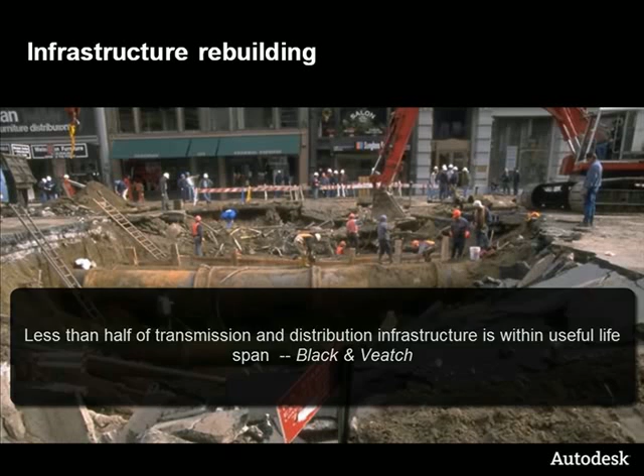Well, and of course that leads to failures. We've seen some of the reports on TV with pipes bursting in New York and so forth. These failures can be catastrophic and extremely costly to repair. That's correct, and because of this, utilities are trying to get smarter about asset management and reliability-based preventative maintenance.

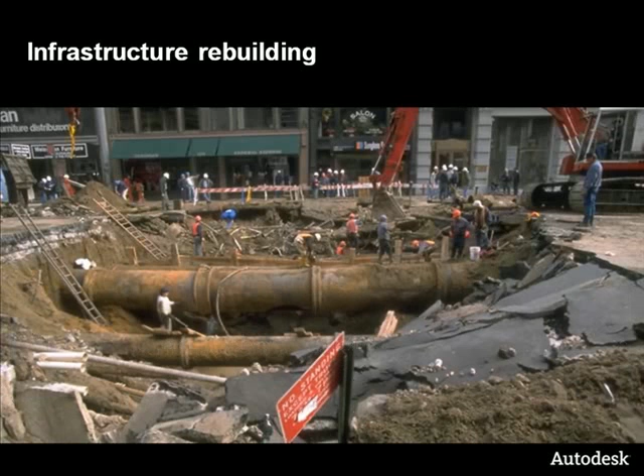So would it be fair to say, Teresa, that all of these renewal projects require design productivity and innovation, as well as much more complete, accurate, and accessible infrastructure models? They need better coordination with a variety of stakeholders - the community, local agencies, and even other utilities. In fact, coordination and accountability will be demanded of agencies receiving government stimulus dollars.

So productivity and efficiency is even more important now because everyone's watching their budgets. Would you say that's correct? That's right, they have to do more with less and be more productive, while also worried about losing some of their workforce. This workforce that they're losing are people with a lot of knowledge about processes and service area, and that knowledge loss can also slow down productivity.

At the same time, utilities face continued pressure to provide reliable, quality service. And it doesn't stop there - even regulators and government agencies continue to pass more stringent reporting requirements for environmental and public safety programs, to name a few. All of these require ready access to the latest infrastructure information, and frankly, a lot of utilities just can't get to that information quickly.

It sounds like infrastructure, productivity, efficiency, and service quality - these three topics will resonate with every single utility. I would agree. Pete, what I'd like to do now is talk about why Autodesk within the utility industry specifically. Utilities have to extend the accuracy, precision, and value of infrastructure information to design and manage water, wastewater, electric, and gas networks more efficiently and sustainably than ever before.

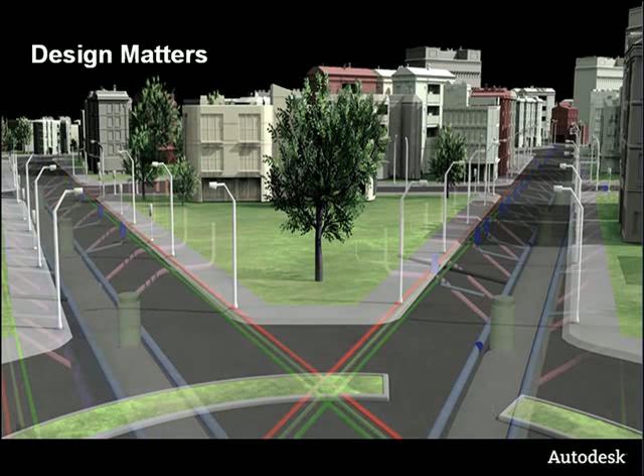All of the challenges we just talked about, they all require design work, and increasingly complex design work. That's correct. An intelligent grid project requires that the utility design their network down to the location of the smart metering devices at the customer site. And a water system renewal project requires detailed design of piping locations and connectivity, as well as up-to-date information on current asset status and condition.

New designers need standardized processes and intelligence built into these design tools. It's incredibly important to note that we've got a number of existing utility customers that have an investment in AutoCAD-based solutions. They want to maximize that investment, and maximize on the training of their existing AutoCAD trained personnel. The beauty here is that the existing user base is familiar with that AutoCAD environment.

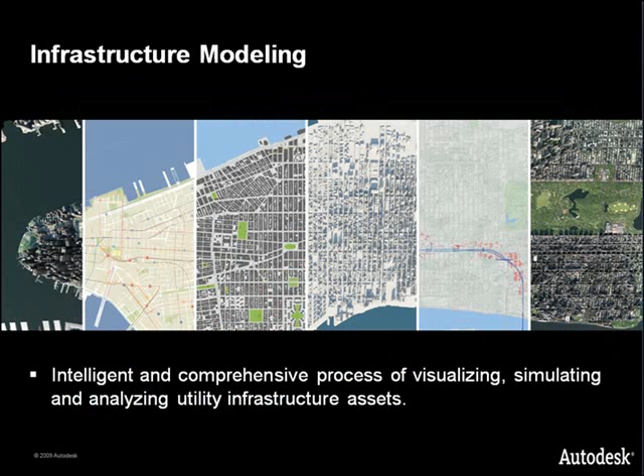So when we talk about utilities managing a more complete infrastructure model, what we really mean is an intelligent and comprehensive process of visualizing, simulating, and analyzing utility infrastructure assets. Because they're sharing this information across the lifecycle of design, build, operate, and maintain, this helps to improve productivity, efficiency, and responsiveness. And of course, more easily handle customer requests, more quickly respond to outages, important. That's right. And more effectively provide information for reporting and decision analysis.

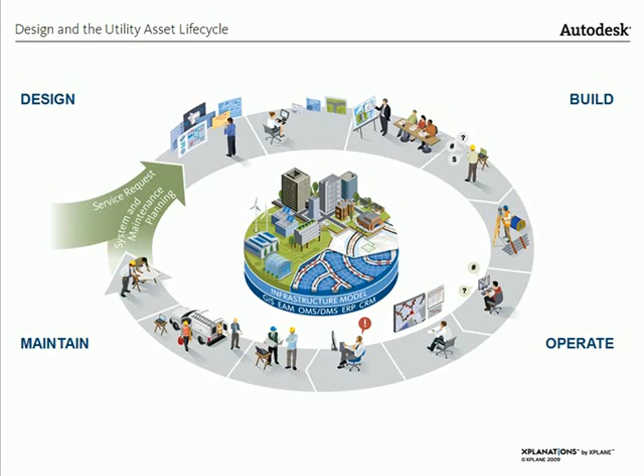Absolutely. Where we want to focus today is on the distribution networks for utilities and that lifecycle we've mentioned: design, build, operate, and maintain. And I would like to start with design, if that's okay with you.

Yep, please do. So a new service request comes in, and it might be coming in from an external agency, and they provide utilities with many types of data, and the utility has to consume and assess this data in order to begin that project. Sometimes these contractors provide data in CAD formats, but it could be in other formats too, like raster images, GPS coordinates, survey data, and there's a wealth of other formats too. Right, all sorts of forms.

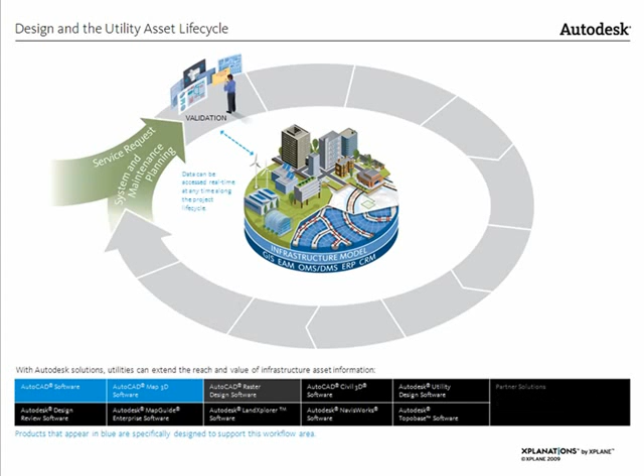And this data, along with the information that the utility already has, maybe about the service area or location information, must be aggregated. Also, another thing to think about here is planning. This whole project could actually be coming from the utility itself, because when they go through their system and maintenance planning, they may identify a project that requires design.

But the big burning question is, how do you do this? The designer needs to consolidate data from external sources, and from the utility's internal systems also. There may be a wealth of information internally. And many complaints we hear from utilities regarding data and integration of accurate data comes from this stage. For example, experiencing data inaccuracies from multiple drafters or poor digitization.

The need for a more intelligent design tool that understands attributes associated with design elements. A need to view and share design and mapping data without making a large investment. They're having difficulties incorporating geospatial data from multiple formats, looking at ways of geo-referencing the designs and easily distributing the information to other workflow applications, distributing information internally and externally, using websites, map books, and publishing information.

Let's take a look at how Map3D aggregates the data. And in order to do that, I've got a colleague of mine, Arnab Ganguly. Arnab, can you explain, please? Yep, thanks, Pete. So what we are looking at right now is the existing overhead electrical wires being pulled in from an infrastructure model. The first step for most projects is for the planner to pull together information from multiple sources to get a clear picture of the project area before doing their work.

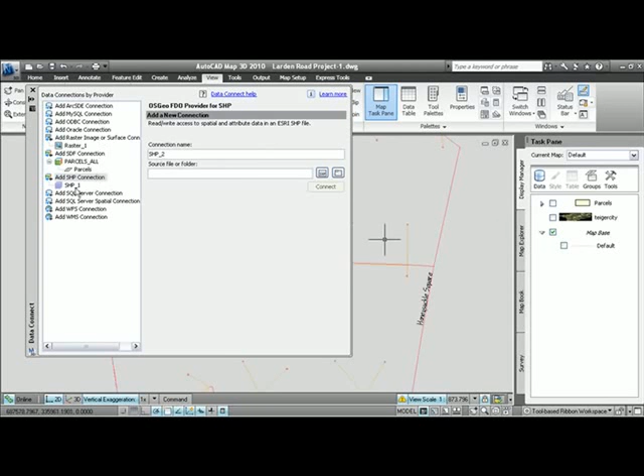Now, Map3D is an ideal tool for this planning step, as you can see here. The planner can very easily pull in data from a variety of sources. First, we will use FDO to pull in building footprint information from a shapefile. Once the planner has the existing utility facilities and building footprints, to properly plan the new network in its real-world context, the planner is going to bring in some satellite imagery. To make sure that they have all the right easements, they will bring in parcel data from a local land department.

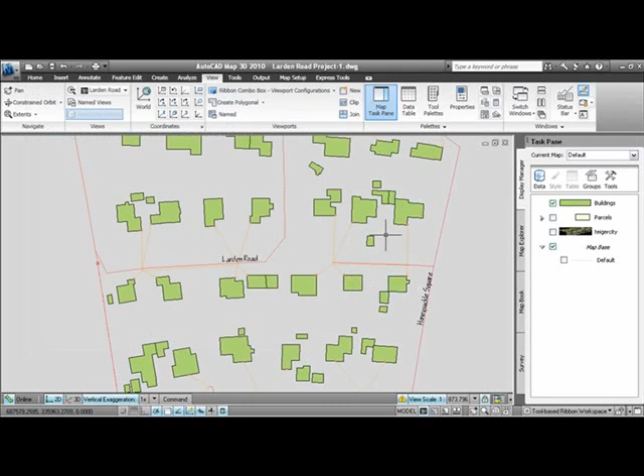And finally, information from the water utility, because crews are going to dig up the roads, and obviously the planner needs to know exactly where the existing pipes are so that they don't send the crew to dig up the wrong areas.

Once the base map is ready, the planner has all the information they need to understand the project and its impact. With this base map data and Map 3D, the planner is now ready to communicate requirements within the utility, with other departments, and coordinate with other utilities on the project. So the planner has effectively all the information needed to understand and communicate project impact.

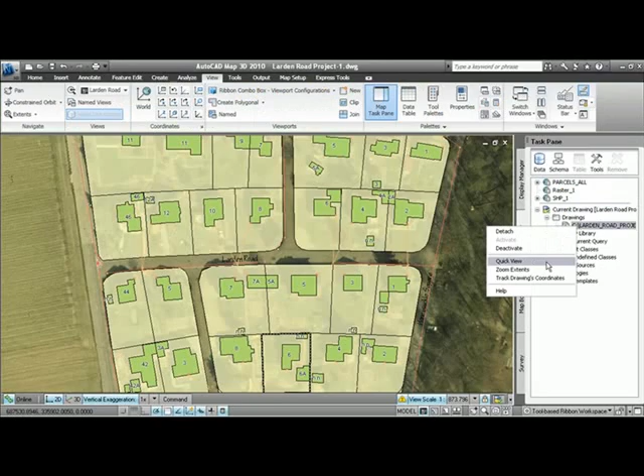So there's more to this design than we talked about, though, Pete. There's some precision design necessary to really address productivity and integration, right? Absolutely right. Autodesk software helps improve design by automating steps to the design process, such as the ability to right-size equipment.

Wow, what a concept - having the right equipment to do the right job. Perform what-if scenarios and engineering analysis, create documentation, identify materials and costs for the project. Automate some of the processes, integrate to work management systems, and generate accurate bills of materials.

These are all things that Autodesk Utility Design does extremely well. And why not do that first in the office - get the design right, the what-if scenario right - before potentially expensive mistakes are made out in the field.

That's right, that's for the electric utility, but on the water wastewater side, we also have AutoCAD Civil 3D for site assessment, trenching, and grading. And even at the water treatment facility, we have tools like AutoCAD MEP to help design that treatment facility as a 3D model before they go into the field.

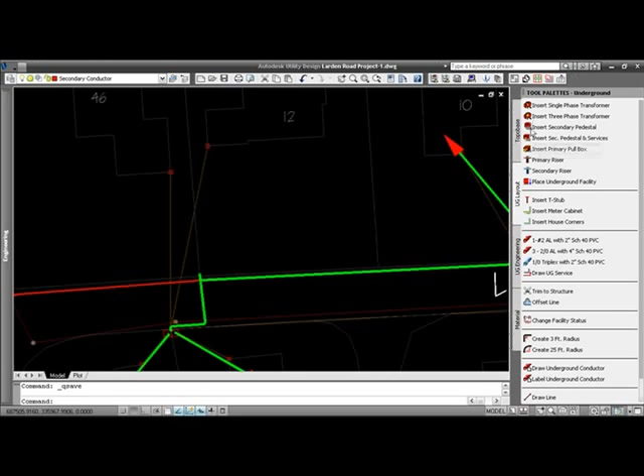Yes, thanks again, Pete. So the next step in the process is for the designer to lay out the new underground network. Today we're going to use Autodesk Utility Design to do this work. As you can see, it's a familiar AutoCAD user interface with utility-specific tools in the tool palette to facilitate layout.

First, the designer adds a pad for the transformer to sit on. They then add the underground line serving these houses. Note that these are not just lines on the screen - these are conduits containing cables. There's intelligence in the design.

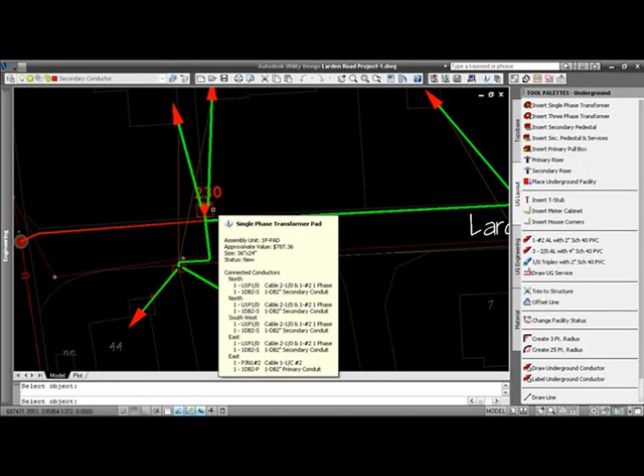So we can just click on the transformer pad and see information about it - for example, the estimated costs and sizing data.

The last thing the designer will do is ensure that the transformer is properly sized to serve the new connections. Analysis like this is a great way to build intelligence into the system, to help utilities that have experienced workers retiring and being replaced by less experienced staff get up to speed and be productive quickly.

So here on the left-hand side of the screen, we can see the sizing information for the transformer, and that it is properly sized.

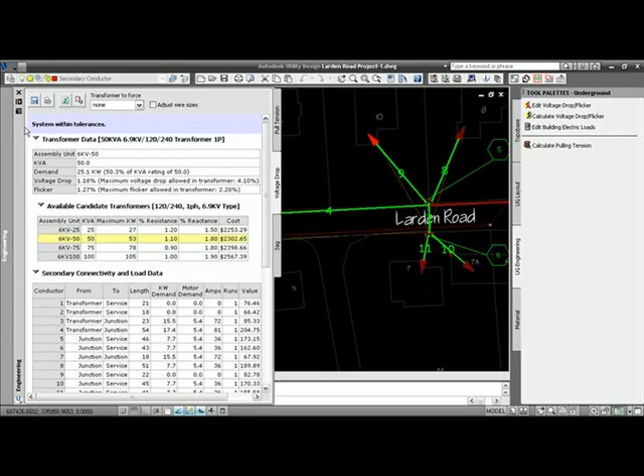So Pete, let's talk briefly about visualization. Often designs and plans must be shared with internal and external stakeholders.

Absolutely correct. Sometimes they have to take this information, these designs, to the city planners or economic development agencies. Projects such as transmission corridors, community development projects have to be presented. In fact, information in a lot of cases needs to be presented to public meetings in the way of exhibits.

Autodesk software provides the capability to manage and visualize these designs with web collaboration and 3D visualization tools. The web collaboration products that we have are Autodesk MapGuide or Autodesk Topobase Web. And let's not forget there are other visualization products in the way of Autodesk LandXplorer or Autodesk Navisworks.

For today, I say we move on to a very important step, and that is ensuring that the most important information for these designs gets to the field. Let's talk about build. Construction documentation, including designs, maps, bills of materials, and other data are distributed to the field.

Autodesk software provides the capability to deliver this aggregated design and geospatial data in a format that can easily be accessed, annotated, and even redlined by the field, and can generate maps for construction documentation. As we mentioned, we have products that provide very detailed project information out to the field. When we talk about water and wastewater projects, often you're dealing with an engineering construction firm that works with the utility to complete these projects.

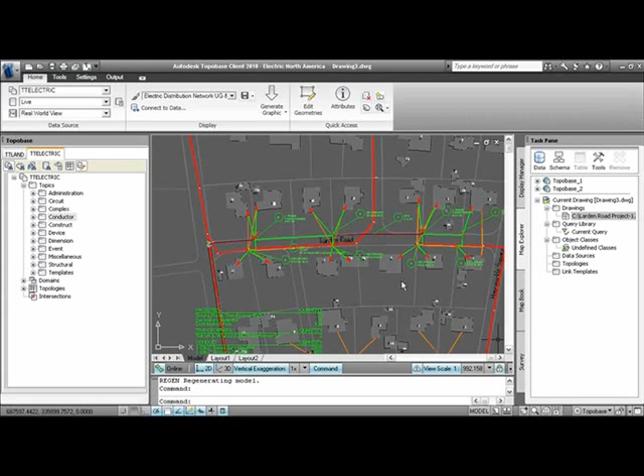Typically, backlogs are a huge issue for utilities in this process, and creating the infrastructure model directly can drastically reduce these backlogs. First, you see the design information overlaid on top of the infrastructure model. Then we check the new assets into the model, and Topobase automatically recognizes what's new and adds them into the infrastructure model, applying business rules to ensure data quality.

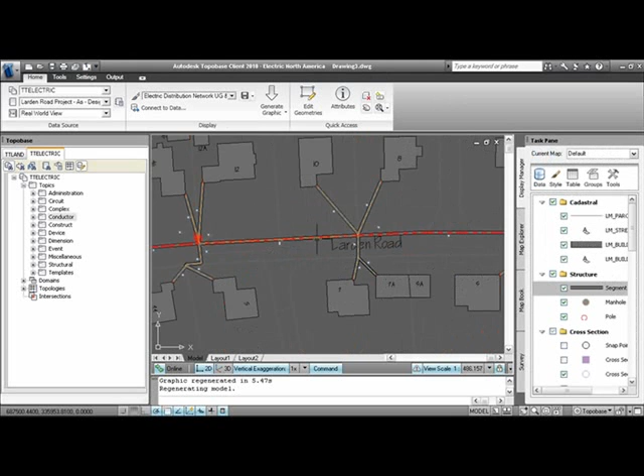Finally, once the infrastructure model is up to date, operations can do things like look at the schematic of what's happening underground. Here we see the configuration of the conduit. This is a very important step in maintaining assets, because if you ever do have to do repair work, it's important to know exactly what's underground and precisely where it is.

Now let's talk about operate. We now have these as-builts reconciled into the infrastructure model, and these updates are now available for anyone within the utility. This infrastructure data provides information that's useful for operations engineering, or is even shared with asset management systems. Absolutely correct, and now the utility has accurate information about the network.

And if there is, and when there is, a service disruption, an event triggers a number of reactive responses, for example customer phone calls, and proactive ones, for example sensors in the network notifications, sensors and network SCADA systems. This can be as simple as a single service point location outage or leak, but it could also be a more significant disruption of service over an entire area.

You're absolutely right again. Autodesk provides visualization software that can help customer service or the control room access geographic location as well as asset information about the network. Our customers use our web-based utility solutions built upon Autodesk MapGuide.

So I get it — we looked at the four primary areas. In fact, we only looked at three of them: design, build, operate. What's the fourth one, Teresa? Maintain. So now we're in the maintenance and planning phase of this life cycle.

It's important to note that a change to the network can happen as a result of a service disruption like we just talked about, but it could also be the result of internal planning and maintenance activities. Absolutely correct, and it's all around assessment.

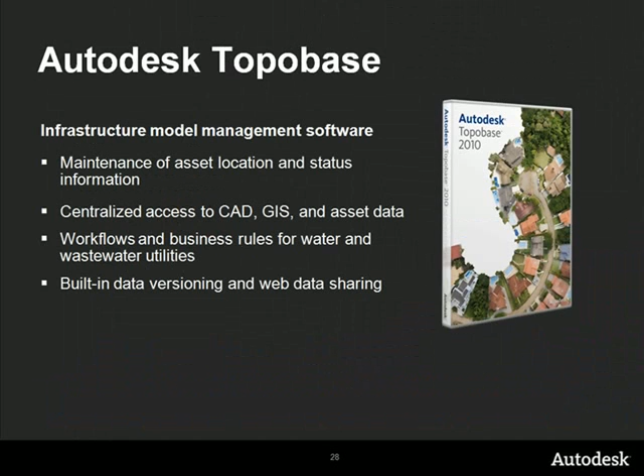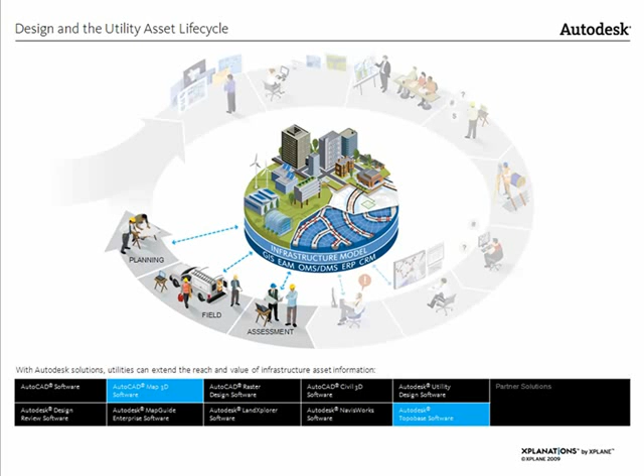We've gone through the complete life cycle of our infrastructure: design, build, operate, maintain. One thing I'd like to bring up again is system planning and maintenance planning. We've talked about it a few times already, but the point I'd like to make is that this happens all along this life cycle. It's not just happening once. No, absolutely correct, it's a continuous process.

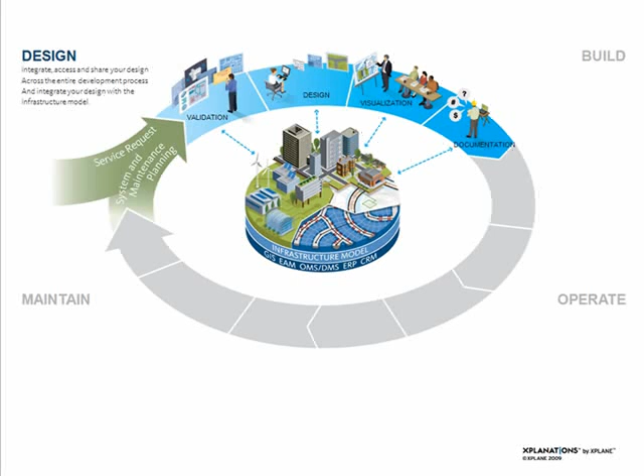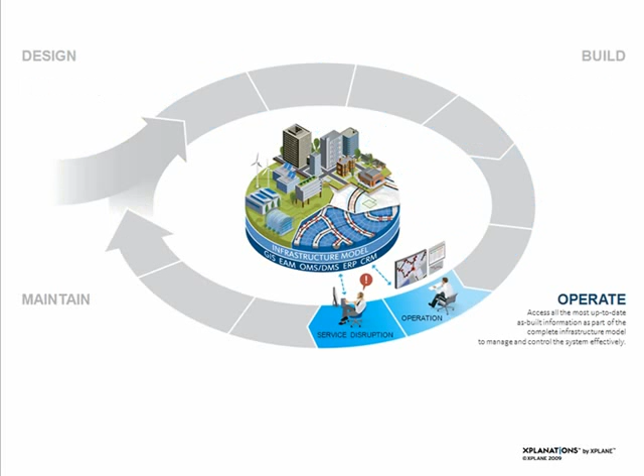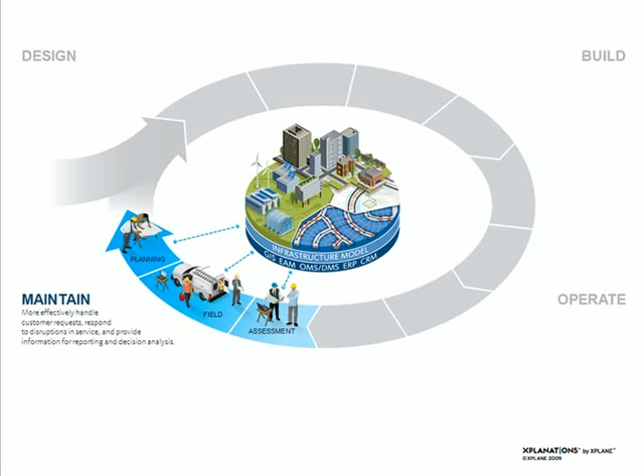Remember, all this asset information, these reports, the thematic information, queries, all of the infrastructure model in its whole glory that is aggregated—this data is used to help assess things like brand new service requests, from design straight through to the planning stage, planning for future projects that may come through, even reports to regulators or stakeholders.

Let's talk about the Los Angeles Department of Water and Power. They're delivering reliable, safe water and electricity supplies to more than 4 million residents and businesses in the greater Los Angeles area. But by the 1980s, the system's age and size were taking a toll on water service staff and those of other municipal agencies as well. So fire, police, and gas all had to deal with huge paper maps to pinpoint locations of critical infrastructure, and that was their biggest challenge.

They faced the challenge of manually maintaining their infrastructure data, and they'd been doing this since the mid-1980s. This meant a growing strain on budgets for staff and training as the city grew to become more densely populated. Employees spent most of their days updating designs manually and distributing maps on demand.

The answer was an Autodesk suite of software solutions bringing Los Angeles' vital water infrastructure into the digital age. They chose AutoCAD Map 3D because it allowed them to better utilize their AutoCAD-trained workforce, and they could also provide engineers with direct access to data and improve decisions with analysis and visualization tools.

But there was more. They could support design and as-built data flow to GIS, asset management, and other applications, and improve sharing between engineering and all of the stakeholders within the utility. Absolutely correct, and they did this with Map 3D because this software is a better AutoCAD for utilities.

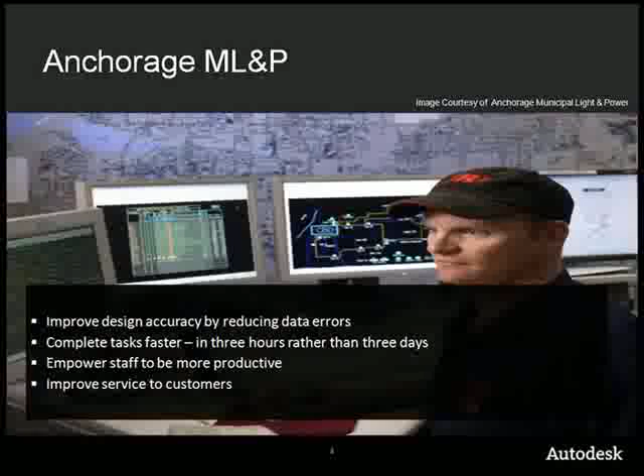With Autodesk Utility Design, ML&P is able to improve design accuracy by reducing data errors. They do this with standardization and processes that all designers can follow. They can complete tasks faster, in 3 hours rather than 3 days, and empower staff to be more productive, focusing on important tasks rather than manually entering the same data multiple times.

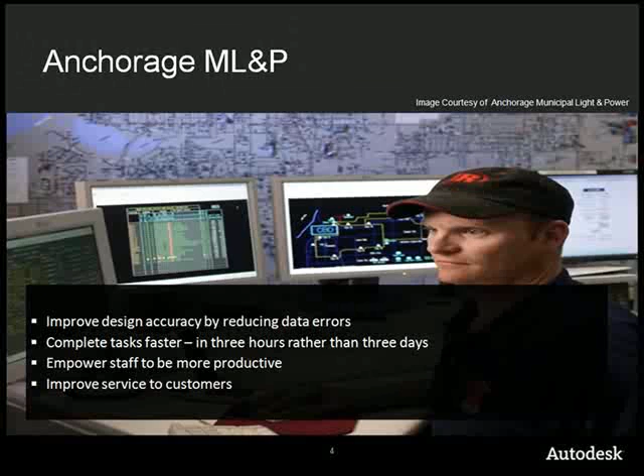This ultimately improves service to the customer. They're able to achieve this because of the ability of Utility Design to build intelligence into the designs and automate the process. The city of Beloit, Wisconsin.

With so many stakeholders, it's often not uncommon for a project to be two-thirds of the way done and then suddenly things change.

So the schedule changes, the time frame, the scope of work. And what the city's engineering division needed was to be able to respond quickly to those changes, and they needed civil engineering software that can react as quickly as they do. And they chose AutoCAD Civil 3D because they believed it would make them more efficient, more productive, and responsive to these field teams. So what you're saying is AutoCAD Civil 3D software gave the City of Beloit the dexterity to accommodate changing project priorities and schedules.

Absolutely. During Arnab's presentation at Topobase, we alluded to a backlog of work requests, and that's a common problem with a number of utilities around the world. But a great example of a utility that really embraced an Autodesk solution like Topobase to actually integrate their design with their asset management data is the Las Vegas Valley Water District.

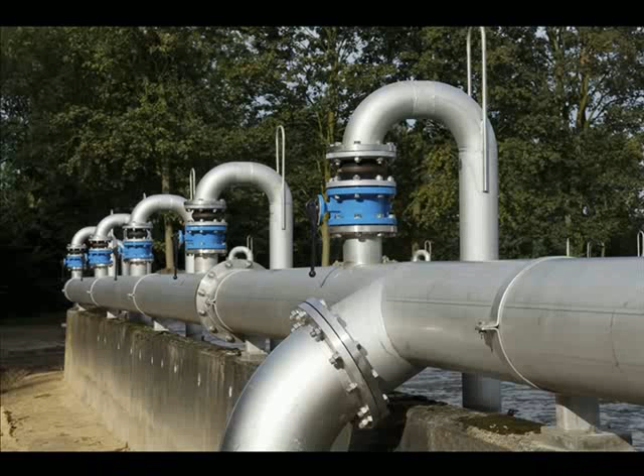They had over 3 years worth of backlog of requests, and it turned out that very roughly 25% of their existing GIS staff's time was used just fixing data errors. And of course that resulted in an incredibly high system maintenance cost. Now they chose Topobase, and they chose Autodesk to supply Topobase, because of a number of very good benefits: open, flexible architecture, very easy to integrate and connect to their incumbent proprietary systems. Infrastructure design and management, they wanted that in a single environment. That's exactly what Topobase gives.

And they wanted a single source of truth. Some of the benefits, or some of the gains, that they saw as a result of this was eliminating their project backlog, which was huge, being able to complete projects about 20% faster, and then reducing data correction by about 15%. And this resulted in about $460,000 worth of annual data management savings for the company.

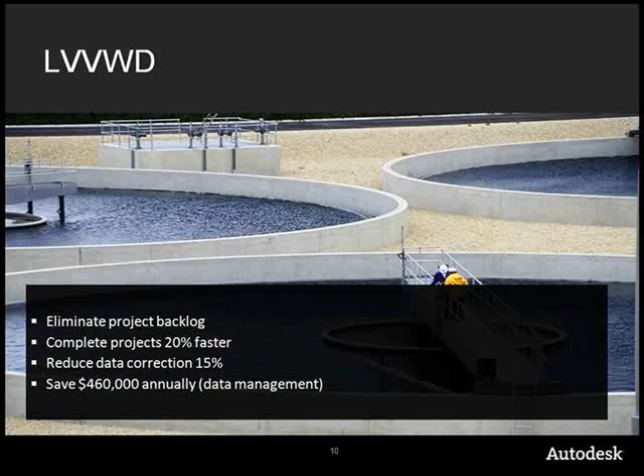And Jonathan Pickus, the manager of the AMFM GIS division, told us that Autodesk Topobase complements our existing enterprise systems, including ESRI ArcSDE, and allows linkages with Hansen Asset Management and PeopleSoft through a single interface. So within a 5-month period, they were able to incorporate the software into their system from start to finish.

The City of St. Paul Department of Public Works in Minnesota is a mid-sized utility facing all of the challenges we described earlier. Their sewer lines are over 100 years old in many places. They are losing experienced workers, and their customers are demanding better service coordination. Just a few years ago, the department had all of their network information on more than 2,500 paper network maps. While these maps were accurate, they lacked the precision inherent in CAD drawings, and they were not easily accessed beyond a few everyday users with specialized knowledge.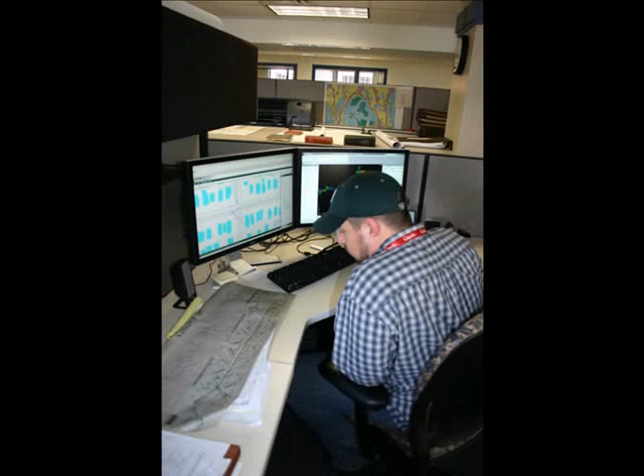Now, using Autodesk's infrastructure modeling solutions, including AutoCAD, AutoCAD Map 3D, and Topobase, the department has one up-to-date and accurate source of data for designing, planning, and operating, and they can easily distribute project information.

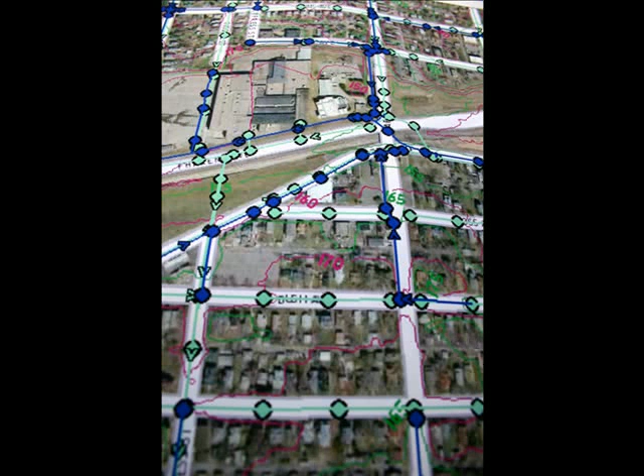One great example: the city has a residential street vitality program, RSVP, to revitalize neighborhood streets across the city. With a complete infrastructure modeling solution, the water utility can coordinate much more effectively with the streets department and the gas company as they replace their lead connections and old mains in sync with other city projects. This type of efficiency in reporting and analysis is critical as the city looks for stimulus dollars and other funding sources for projects like this.

Let's summarize this. Well, first, Autodesk Design Technology will help improve how our nation's water utilities get updated and managed, and also help effectively update aging water infrastructure and support urbanization. Second, Autodesk Technology will help improve how our electric and gas utilities provide and manage sustainable generation, address grid modernization, and intelligent grid initiatives.

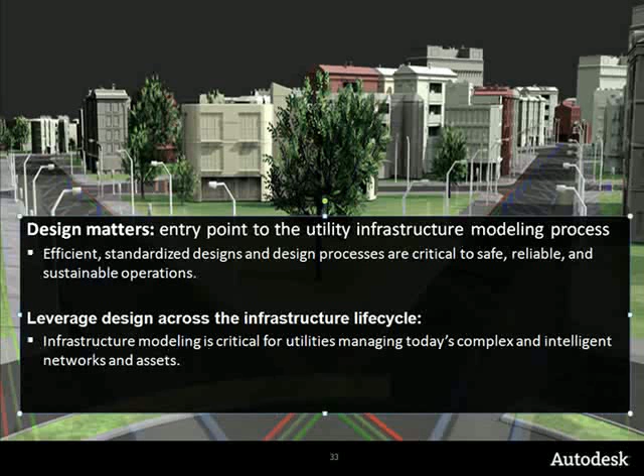And let's not forget, Autodesk Utility Solutions make it easier to consolidate and share accurate model-based design information to improve productivity. We're all after that. But also improve efficiency, improve responsiveness. That's correct. And only Autodesk model-based utility solutions provide the ability to leverage this precision design across the entire asset lifecycle.